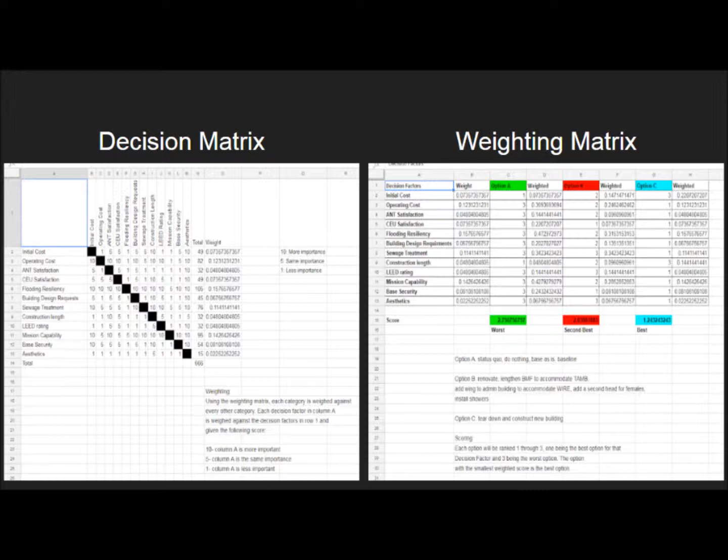As you can see, a multitude of different things went into our decision matrix. Once we completed the weighted matrix, we saw that option A, leaving the building as is, was the worst option. Option B, renovating the base, was the second best option. And then option C, to completely redesign the building, was our best option. Here are the decision matrix factors that we considered. Any further questions, I'll be more than happy to answer.

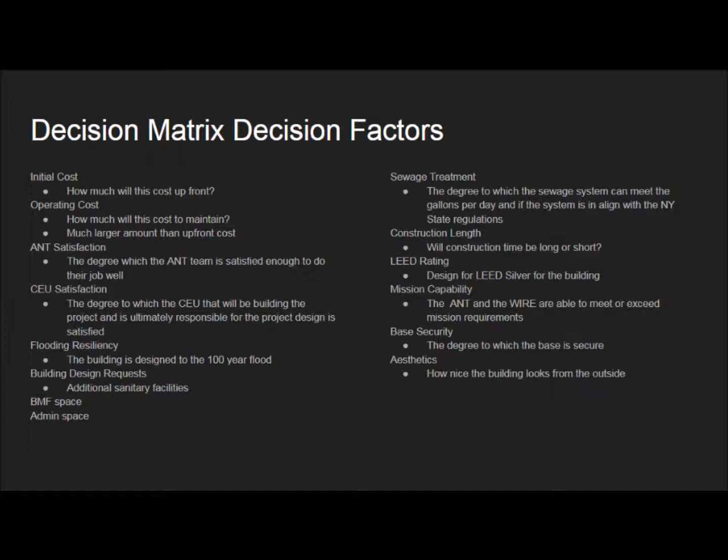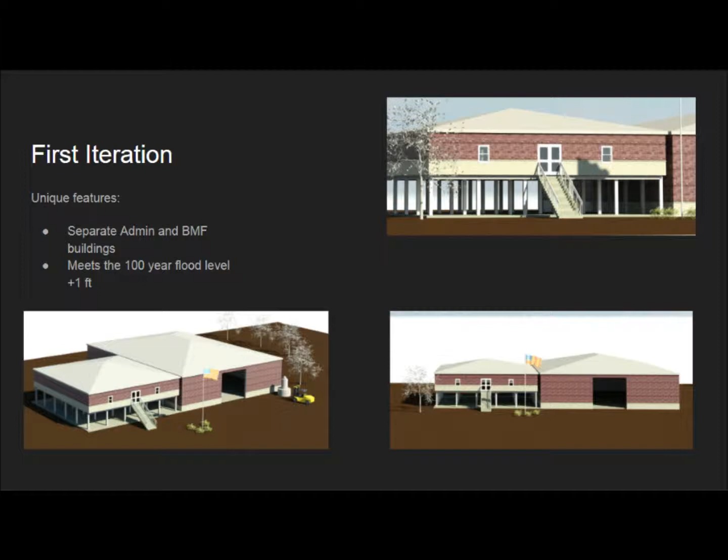For our second iteration, we went kind of with the same concept of having 2 separate buildings. The administrative building is on a raised mound compared to the boat maintenance facility building. Again, both are large enough to house a crane, small boat, and forklift. Now, the reason we didn't go with this iteration or anything like it is simply the geotechnical challenges that we would face with having a building raised up on a mound, especially during flood events. Also, to build to the 100-year flood level, we'd have to build a mound 9 feet above sea level, and that creates a lot of technical issues.

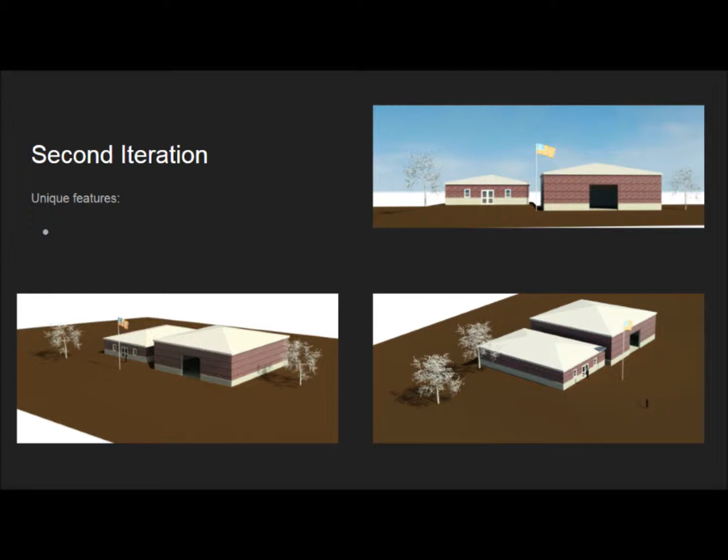So for our third iteration, this is really where we got the idea of having a combined boat maintenance facility building and an admin building with lofted storage for flood events, still having that roomy boat maintenance facility bay that can house a crane, forklift, and both small boats. As you can see, the administrative space is on the 2nd floor, and on the bottom floor is the boat maintenance facility bay, as well as ready storage lockers and heads.

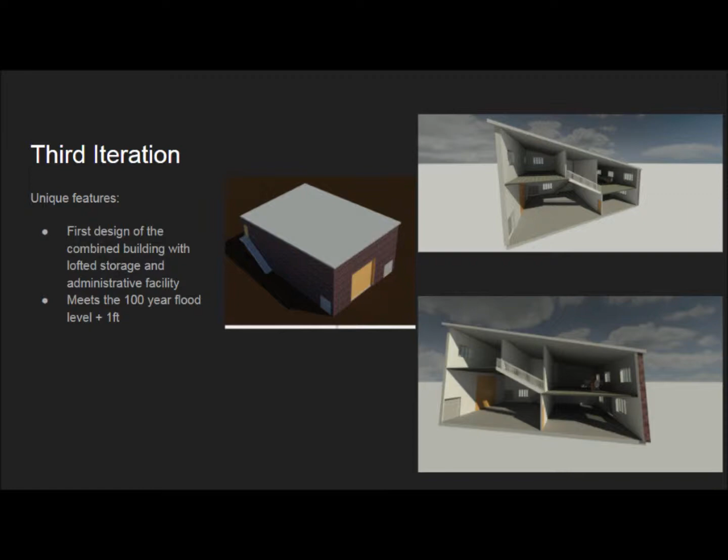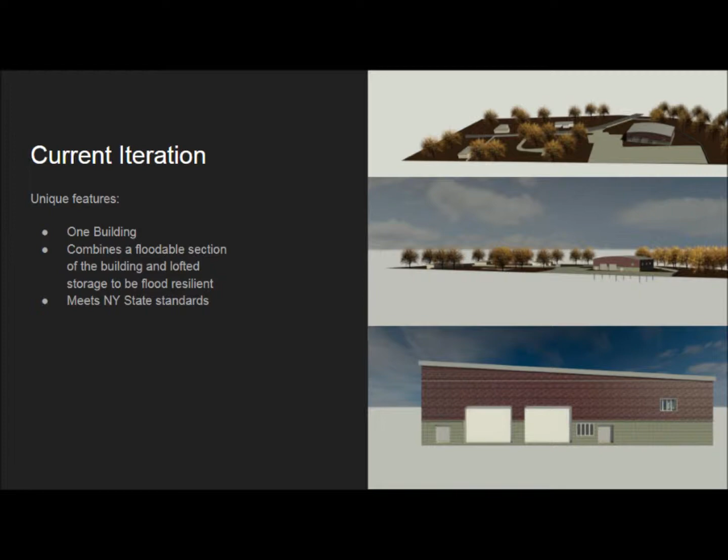For our current iteration, we took that design a step farther. We made every room up to the space allocation manual standards. If you'll notice on the pictures on the right, the building has a floodable section to the 10-foot level. That whole area is designed to be flooded, and it meets the New York State standards as well as Coast Guard standards. As you can see here from the elevation views, on the right-hand side on the 2nd deck is the administrative space.

On the left-hand side at a height of 15 feet is the lofted storage bay, and that'll include two sliding garage type doors to allow for quick and easy storage before a flood event of all materials in the boat maintenance facility bay. So you can use a forklift and move pallets of stuff 15 feet above where the flood will occur and keep it dry, and that'll greatly increase flood resiliency and reduce the time it takes to get back to normal missions.

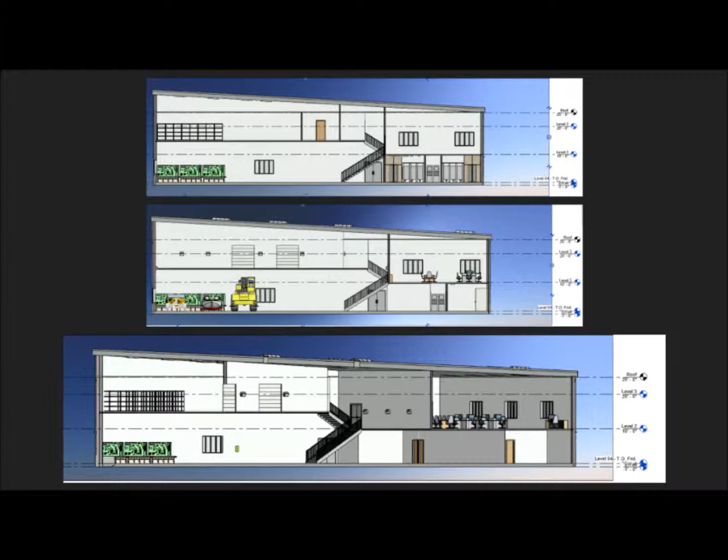Based on our current iteration of the building design, we made a rudimentary cost estimate. What this estimate includes is the walls, floors, roof, windows, doors, stairs, carpeting of the admin building, and the steel frame of the building. What we will include when we have our final presentation includes the foundation, furnishings, excavation, fence around the base, the boat ramp, WIRE hotel services, demolition of the building that's there, temporary services. So again, this cost estimate is very rudimentary, and is pretty much just the shell of the building that we have right now.

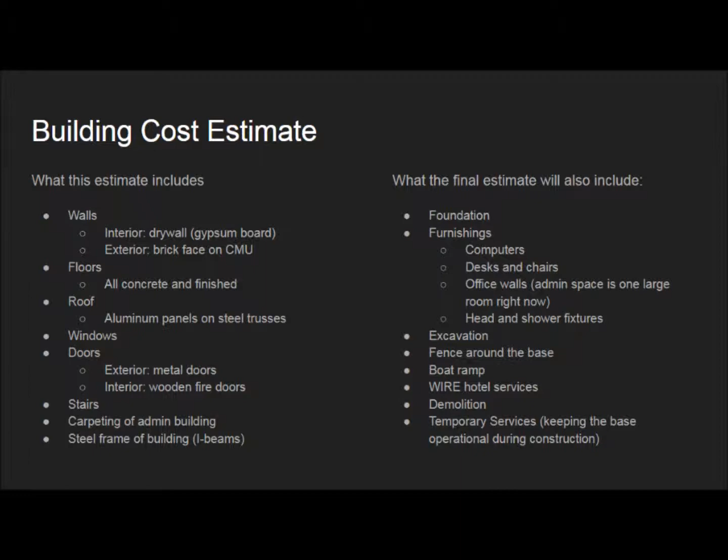So this cost estimate was done using RS Means 2012 as the reference. These references were put into a spreadsheet that was constructed by Commander Nakagawa, and it includes the reference number for RS Means, so you can refer back to it, the cost per unit, and the total cost of each aspect. Each thing is then added up, inflation is added, and the final cost is given.

So looking at the spreadsheet, we have our inputs here. It gives basic information about the project, basic markups, location factor, which is also found in RS Means, and the most important aspect, the time factor. So based on RS Means 2012 and a construction start date of January of 2025, and assuming an inflation rate of 3%, we are able to, again, mark up that final cost and give a better estimate of what the project will actually cost.

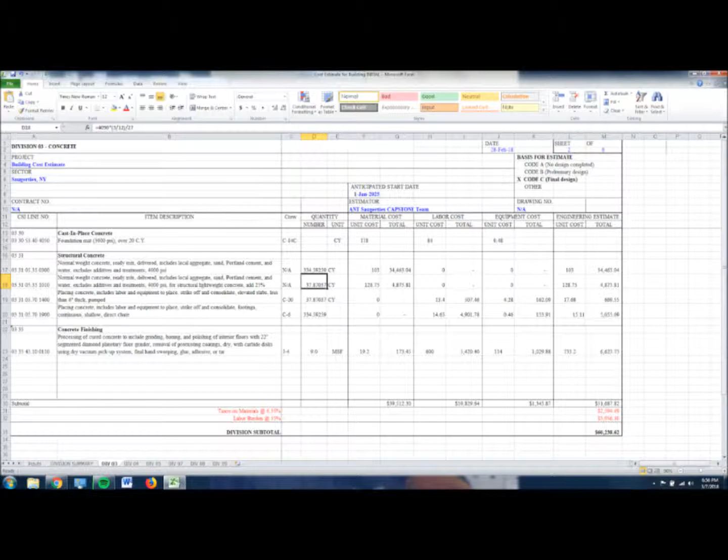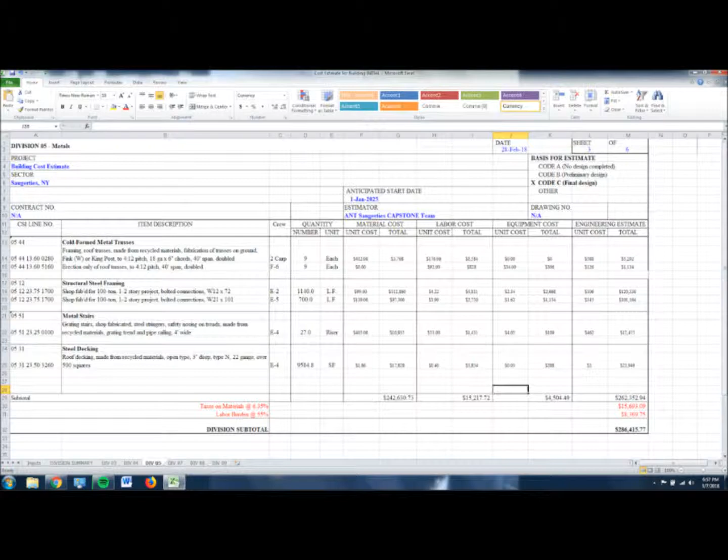So the way RS Means works, it divides each part into a division. So division 3 is concrete. You can see here just different kinds of concrete. We have our foundation mat information already put in, but there's no cost right now because we haven't designed the foundation quite yet. But going into division 4 is masonry. So this is for the exterior wall. Next, division 5, metals. So this is that steel frame, the stairs, the base layer of the roof.

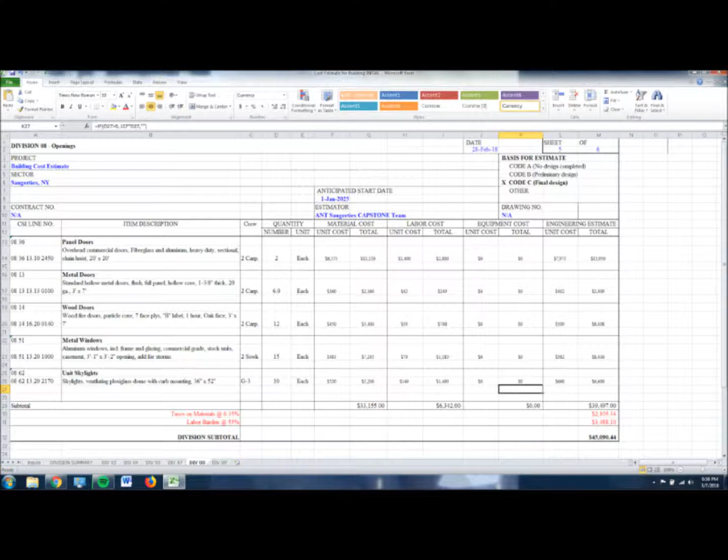Division 7, thermal and moisture protection. So that's the roof and the insulation. And Division 8, openings. So that's the doors and windows. Division 9, finishes. So that's the drywall and carpeting. And then all those are put into this final spreadsheet, which includes the overhead, profit, bonding, and then the location adjustment factor, and finally that inflation cost, which right now we're looking at about $1.5 million for the building shell. And we're looking probably at about double the cost for everything else. So maybe around $3 million, just a very, very rough estimate.